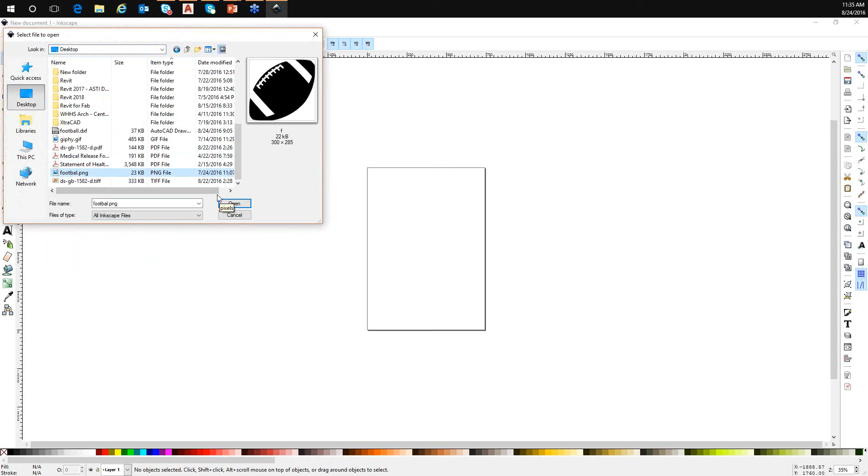I'm going to go ahead and open this image. It's on my desktop. It's football season. Okay, football, I apologize for that. So this is just an image I downloaded off the internet. I didn't do anything special to it. Obviously it is in black and white. If you're going to do something like this, black and white images is definitely the best way to go.

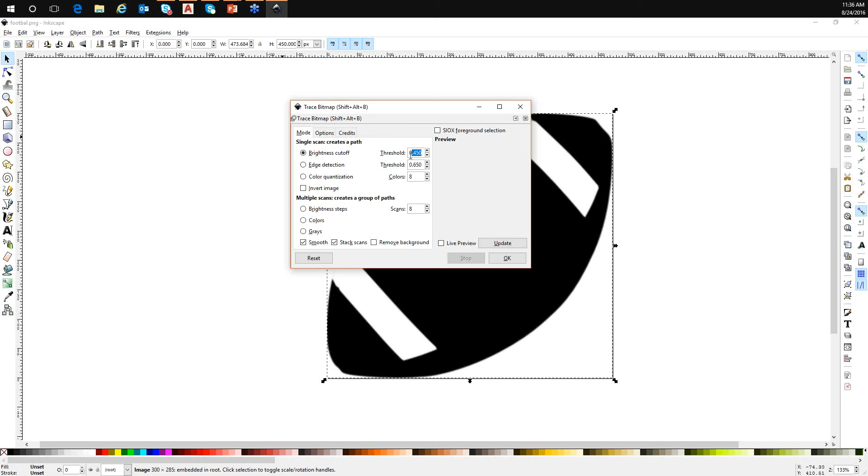So I'm going to use this. I'm going to click on the image, right-click, and go to Trace Bitmap. There's some options here to get a more optimized result of the tracing. I think by default it comes in at like 0.4, but I found a better result when I upped it to about 0.45. So I'm going to hit OK, hit Update, close this, and now move this off to the side.

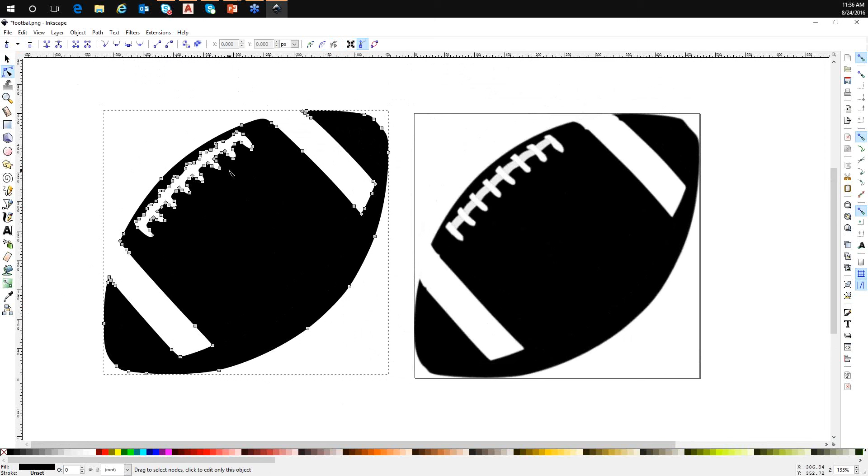Now we have two footballs. I'm going to turn on Edit Paths by Nodes over here on the left side. Now you can see these grips, which is pretty similar to what we see in AutoCAD. That's what we're looking for. So let's get rid of this football, and move this one back over here.

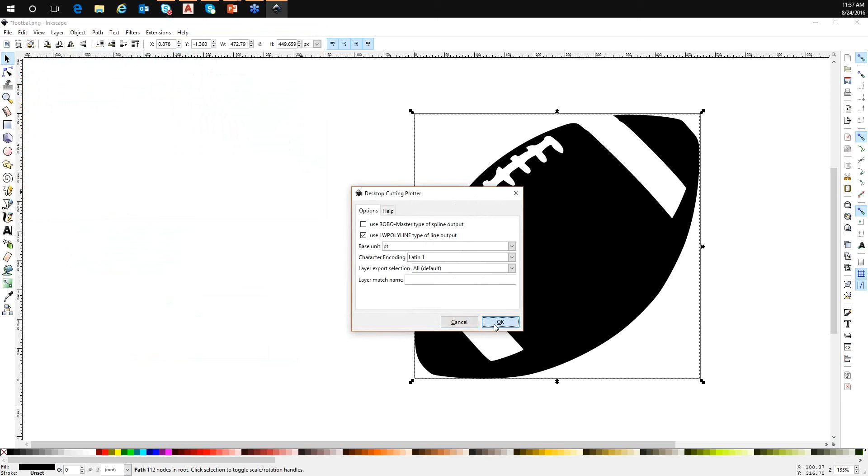Basically what we did, we just vectorized that image. I'm going to save this as a DXF file, something that we can open in AutoCAD. I'm going to save it here, and I'll replace it. Now that I've got that, I'm going to open my AutoCAD and open that DXF. Pretty cool, now I've got line work.

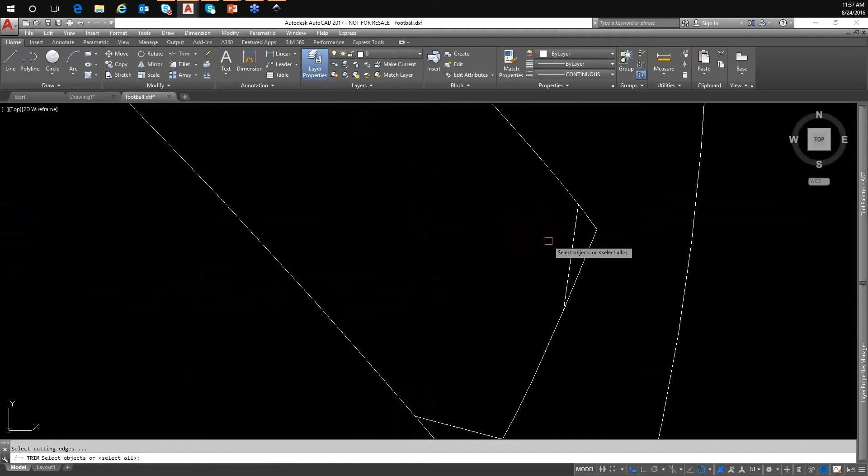Now this gives me a chance to clean this up. Obviously I don't want a cut there, so I can just use the regular trim command. Clean that up, clean that, and get rid of this stuff here.

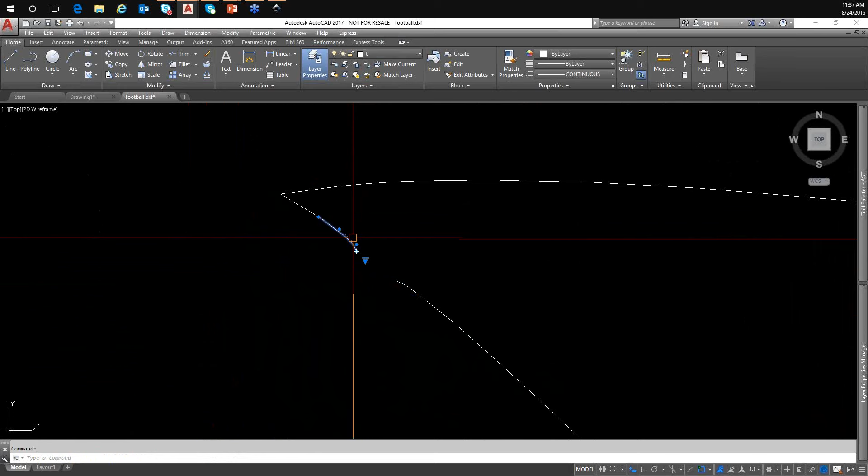Maybe you don't want that to be that way, so you can just delete and grab that node, marry it up like that. That didn't work, let's go back. Grabbed the wrong node, there we go, and let's do this one.

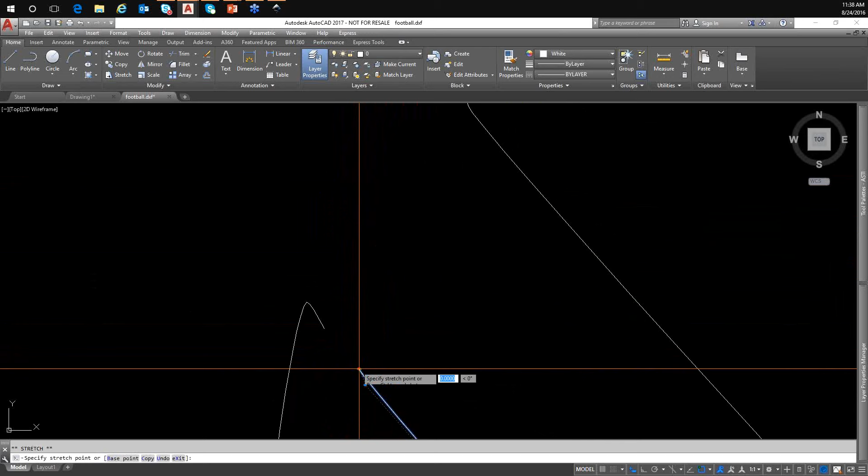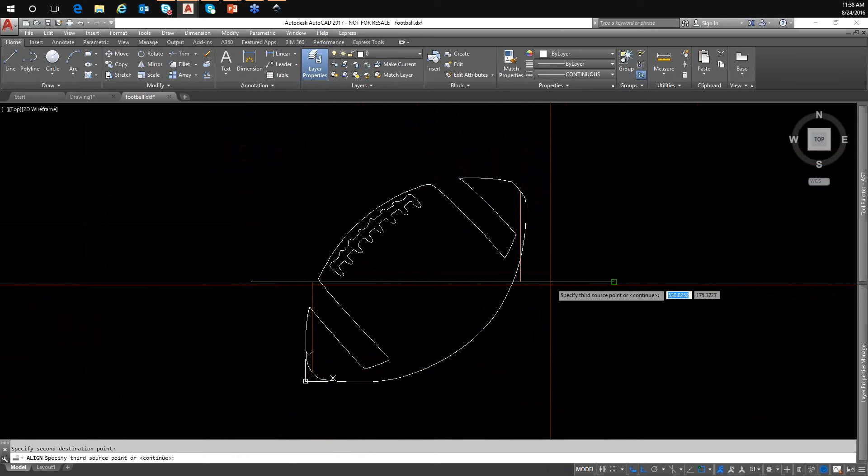Now let's scale it down because we want to burn this thing out in 12 inches. So we'll scale using that reference, take that length, and we'll say 12. Okay, so here's my pattern, pretty easy.

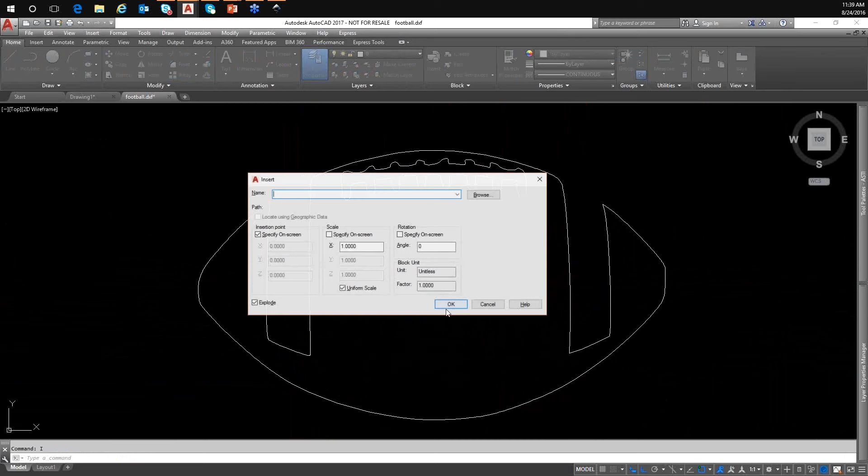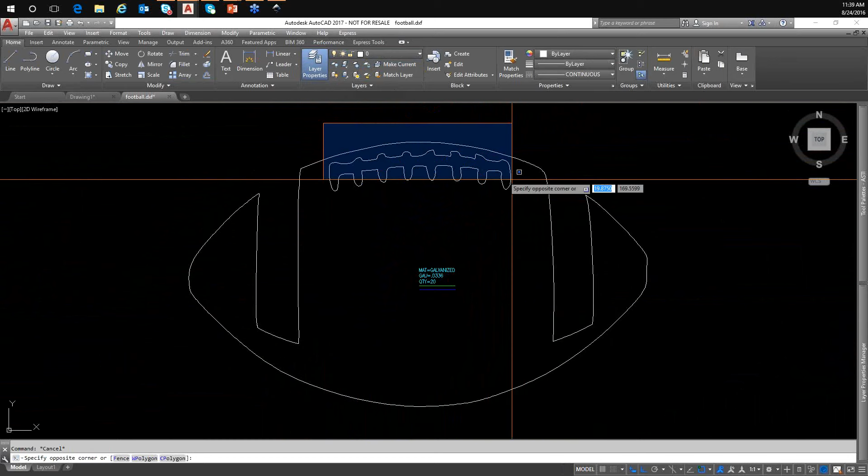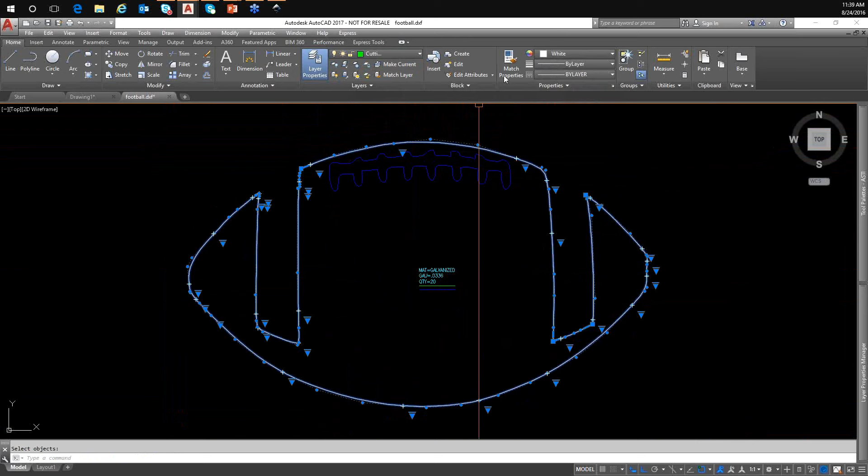What else I'm going to do is insert a block that has some information, and I'm going to put the laces on. We'll say we don't want to cut out the laces, so we're going to ignore the laces. Get the color there. Then we want to select everything else and put that on the cutting layer. Forgot to set it to select previous, and we will set that layer.

Okay, so now I'm going to get rid of these because I don't want to actually cut a line there. We have some information here - the material, we want this material to be galvanized, and this is the gauge. And we want to do 20 of these.

So I've got this image vectorized and cleaned up, pretty short and sweet. I'm going to go ahead and hit save, and save it in the same location. What I'm going to do is pass this off to our CAM guy, and he's going to produce this. So Garrett, I'm going to let you take it away.

All right, David, I'll wait on the control here to get to me, and then I'll start to share my screen.

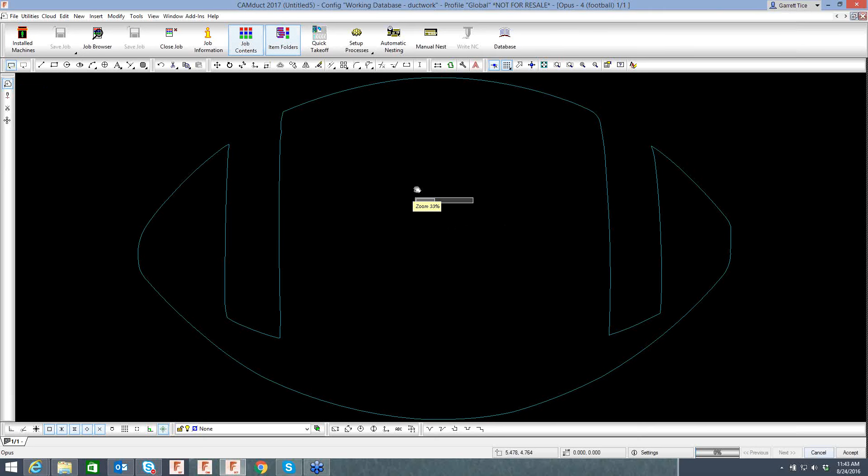And a quantity of 20. So he's letting me know - maybe he's doing cutouts for his kid's birthday party, I don't know - but he needs 20 of these at this size with this material and gauge. Because he already put that information in, I can simply hit OK. Notice that this was ignored, it's not there, it won't be processed. What's most important to me throughout this process is I'm just going to hit accept and go ahead and open, or just bring that in.

Now, I know the name of this webinar - what was it, David? DXF import, part validation, and nesting, right? So we've done a DXF import, and we've validated the part. I'm going to go ahead and nest it so we can say, hey, we did what we said we were going to do. But we're going to get a little bit deeper than that.

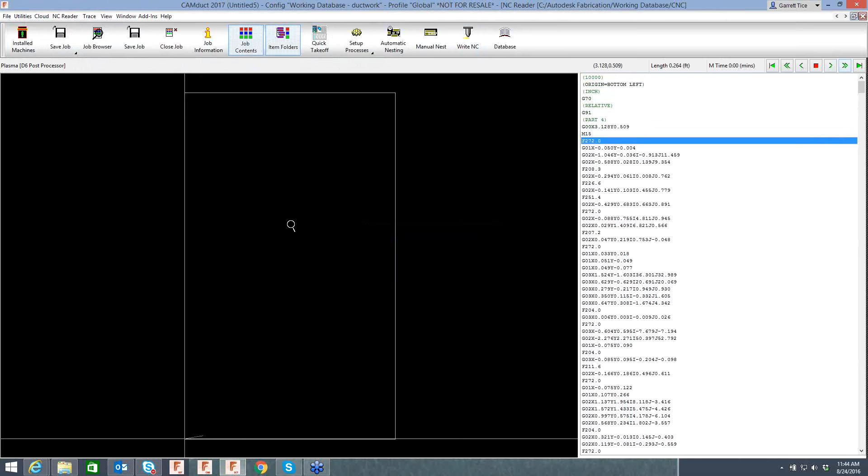It's a pretty straightforward process when importing these things. But now that we've nested it, we've done everything we said we were going to do, but we're going to get into the weeds a little bit more. I'll let this just run all the way through here - I won't make you sit and watch it, we'll just run it through.

Notice that the laces weren't cut. I'm going to go ahead and run through that process one more time, just so I can show you a little bit of flexibility when you're bringing these things in. But before I do that, I want to enter the database.

Under manufacturing, you have your layers. So if in AutoCAD you have a detailing department - such as David being my detailing department, I'm his shop for this scenario - we have the same database, so we have these layers. If David sets up a template, or you have your user set up a template, they can set up layers inside that template with the colors. As long as those layers are named the same, it will transfer over whenever the import happens.

So this says display only, that's fine - display only, default cutting, that's just our layers. Now we have layer mapping. Notice that my ignore layer, whenever it's brought in, comes to the ignore layer, and I have it set to ignore, which means I don't want anything. You could create an additional layer for marking, for example, if your table has that functionality. You can call out marks, you can call out cuts, just straight from a DXF.

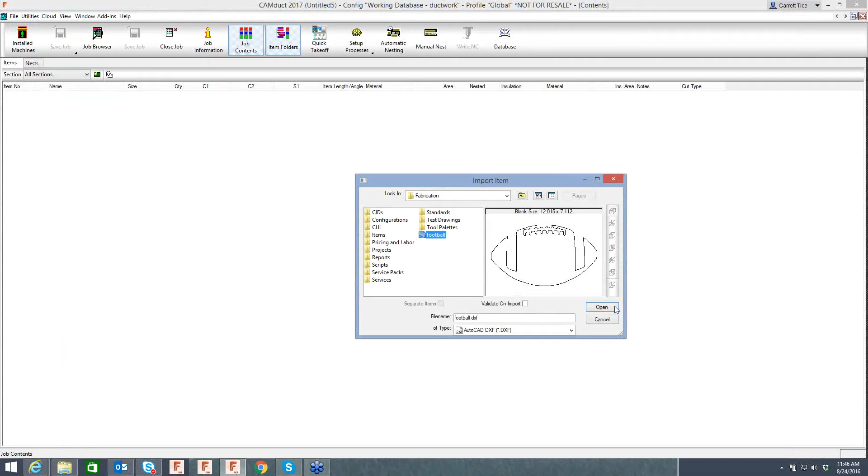So I'm going to go back into File, Import Items here, and we'll grab that football one more time. This time I actually want to cut these laces. So I can come down to the ignore layer and I can say, actually, I want you to process the elements. That's an element, it is not text. Go ahead and hit OK there. Now you can see that I have the laces.

Another thing I want to show you is, for the beginning of the example, David went into AutoCAD. He cleaned up the image, he did some things. What happens if you don't have AutoCAD? What happens if you strictly have CAMduct and someone sent you that DXF?

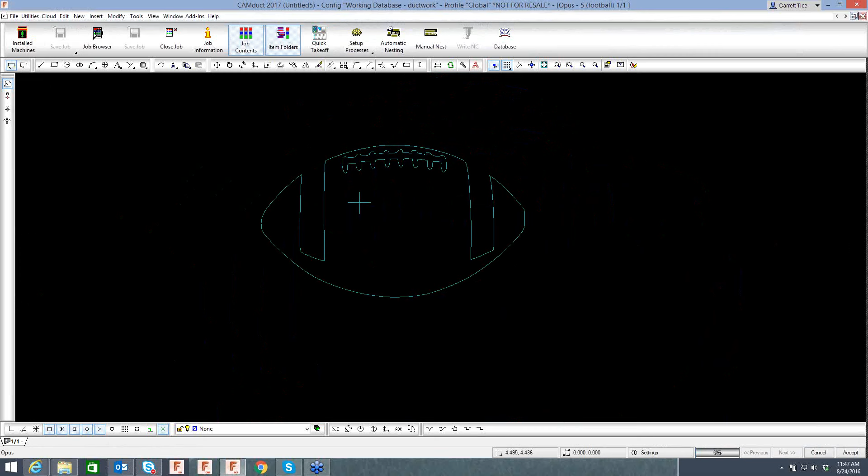Of course, you do have the ability to do the same things. The same things that David was doing, you have the ability to do. So you can just snap, move, stretch, etc., however you need to do it. You have the cleanup tools in here. This is essentially R1 AutoCAD. You can scale it. Oh, well, if I could type right.

Right. I know Fab. I don't know English very well.

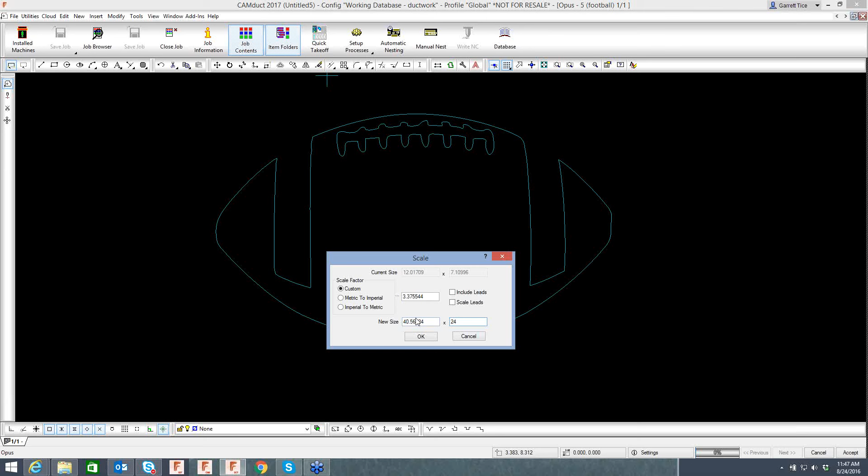Pardon my typing abilities. So here, if I wanted to say I need it to be 24 by 24, notice that based off the scale that David applied to it, it tells me what my 'by' needs to be. So if I want this to be 24, you'll notice that my new size over here will be automatically decided for me based off the overall geometry of the pattern. I'll just set this back down to 18. Hit OK, it should upsize a little bit.

And again, when I hit accept, I'll validate the piece, right? It has everything. It's got 20, it's got 22. It's got everything that I requested it have when David sent it over to me.

I'll go ahead and nest this so you can see that, well, the laces should have been cut. Let me verify.

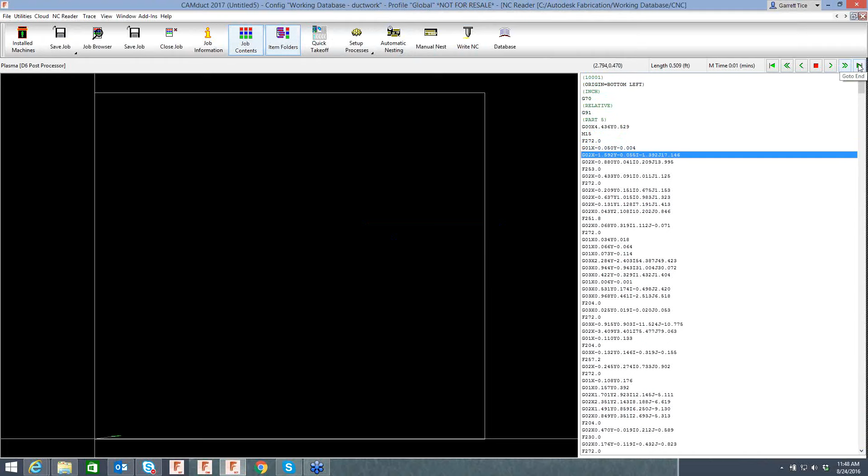All right, so let me go through that again. Import items, we'll grab the football. Oh, unclean. Oh, that's the old one, football.

Process. All right, and I can change this to the cutting layer as well. I'll just re-accept that piece. I'll nest this one here. Huh. That's interesting.

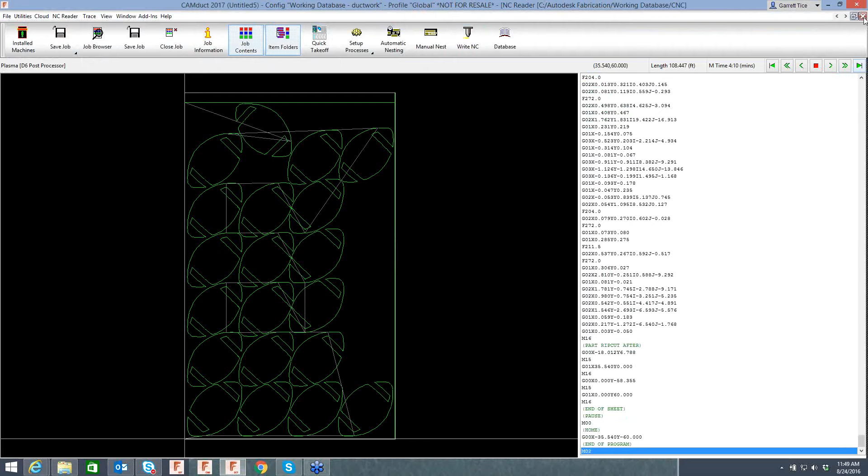I just went through this and it was fine. Maybe I'm missing a step when I'm doing the import. So File, Import, Items. Here's the football. All right, put this to cutting. Process. All right, let's see if the laces nest this time. Nope, still not nesting. Okay.

Garrett, I'm wondering if it's reading from your database item. I think you saved the football in your folders. Yeah, I believe I did a while back. Maybe delete the one out of your folders and then bring it back in. All right, but let me look at the tool here.

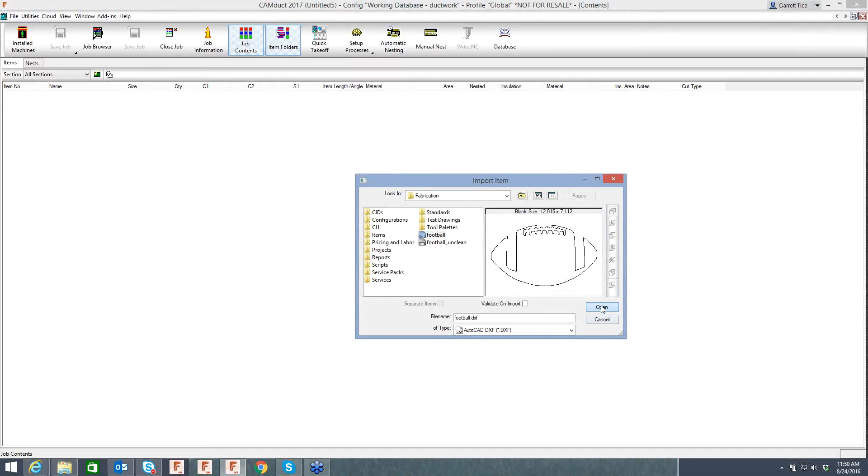There we go. Been missing one the whole time. Just change that layer to use the proper tool. It had just been ignoring it. Nope, it's a combination of all of those.

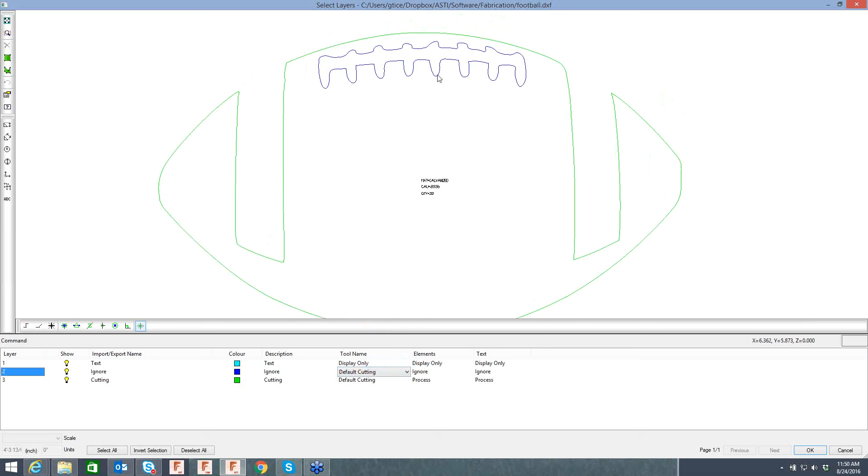So when I'm importing this item here, football, I need to set my tool name not to display. I need it to be default cutting. And I don't need to ignore the elements. Okay, so it's a combination of these three things. I had that stuck on display only and I didn't catch that. So now when I accept it, it should actually nest the laces.

Still not. So let me see if, because see the one, my football there, David, it does have the laces in it. I see that. So that's odd there.

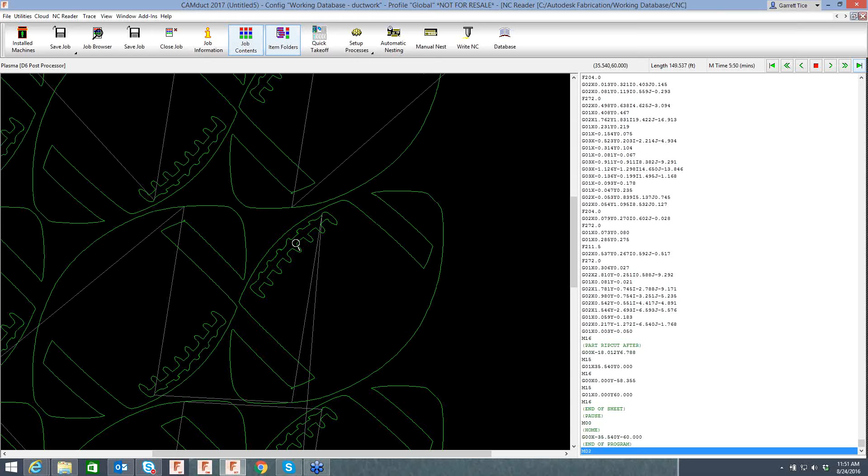Do I need to change the color as well? Okay, now it has laces. It just wasn't showing it. Okay, so it was a combination of those three things there.

So inside of your database manufacturing, under layer mapping, you can set up as many layers as you may want. These are essentially what's going to come in from an outside source. So let's say that you work with David up the road and he does all your detailing and he likes to put things on his own layer, right? If something comes in on David's layer, I can say what I want it to do as far as the map layer. So your map layer is displayed inside of layers. They're created only in fabrication. And this is essentially what stores what tool's being used.

So if you had a marking layer, you could set it to marking. If you have the cutting layer, you can set it to cutting. And based off what layer a certain portion of a DXF is on when imported, it will automatically know what it needs to do with that layer, whether it's to ignore it, to cut it, to mark it, etc.

Now, the text attribute mapping, this is key. It has to go in a certain way. It can't just be thrown in. Originally, when people said attribute mappings, the first thing that they think of is a defined attribute, or an ATTDEF, inside of CADmep or just straight AutoCAD.

That's not the case, it's simply mtext. Your search text must be identical inside of that piece. So if I spelled out, or David, when he sent it over, spelled 'material equals', my search text would not have found that when it imported it. It only looks for 'MAT equals'. So it must be identical.

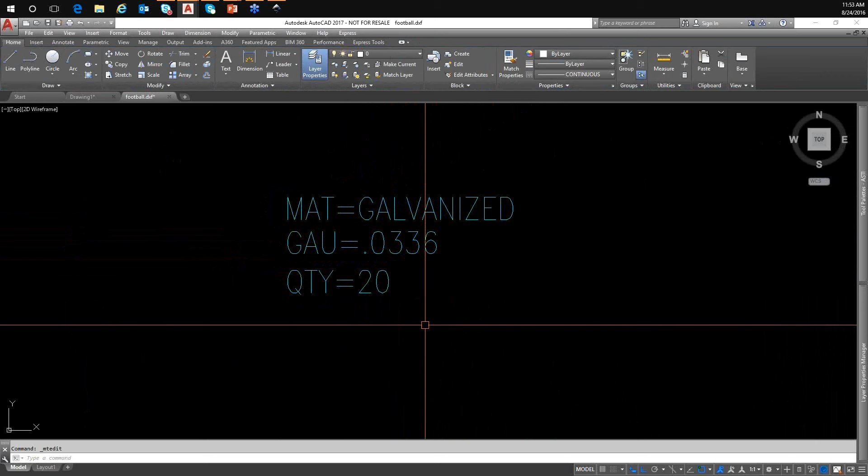So notice that he has MAT equals GALV GAU. All of my search text values are correct here. But one thing I've noticed is you have to physically have the full material name, as I stated previously, as well as for gauge, the attribute in fabrication is thickness. It needs to be that material thickness. You can't just put in 22.

As well, that's all mtext. All we did there was do mtext. Well, you can do it all in one line. I think, David, you've done it on 2 separate lines, right? I have it in 3 separate lines. 3 separate lines, right.

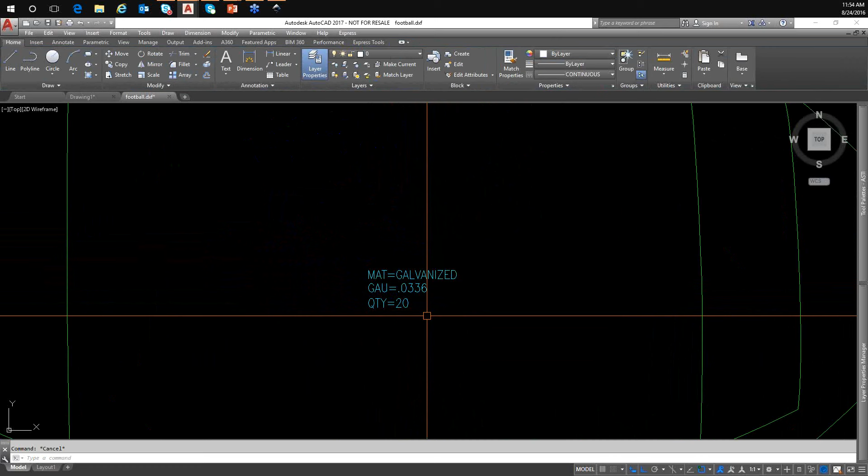So what I was thinking initially was mtext is the identifier or the search text, and then throw in an attribute definition. It's literally all mtext. The only thing you must keep in mind here, zoom out for me David, is those 3 lines of text must be enclosed by the pattern. So he couldn't go put it on one of the layers, right?

So if you want to do that, throw it out there and go ahead and resave this and call it 'bad' or something, and then I'll open it up. And I'll go ahead and steal the presenter role here.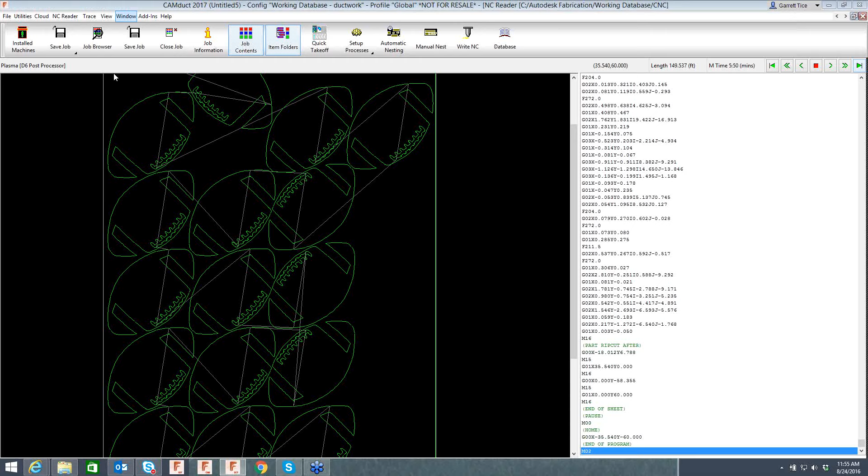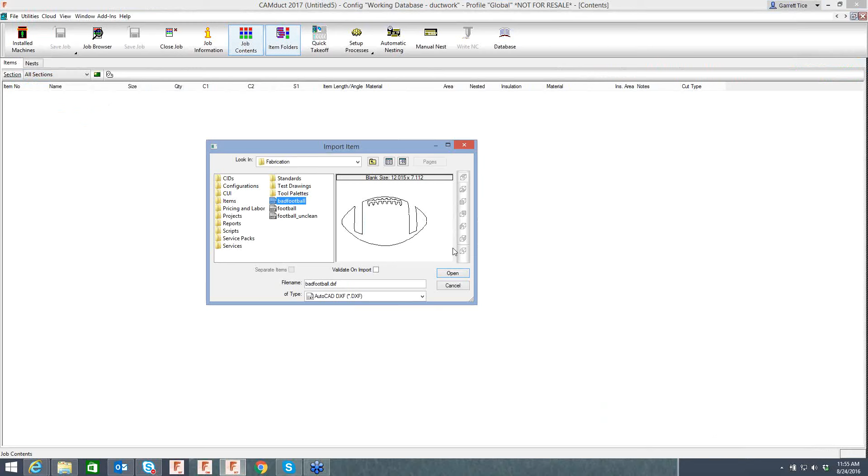All right, so we'll do, I'll just delete this one. So we got bad football. I said bad football, I don't care about the layers there, so we'll hit OK. We'll hit accept. Galvanized 22. I guess that doesn't matter. Proved me wrong again.

But I'm also in 17. Last time I tested with this was 2016, so maybe they've corrected that. But David, didn't we encounter an error with that prior? I think I remember something similar.

I was under the impression it needed to be inside the bounding area. Correct, change the layer though. I think that's a cause as well, because it's on that text layer, so it knows just to process that. Yeah, if I put it on a 0 layer or some other layer that Fabrication Database isn't looking for, that'll definitely mess it up.

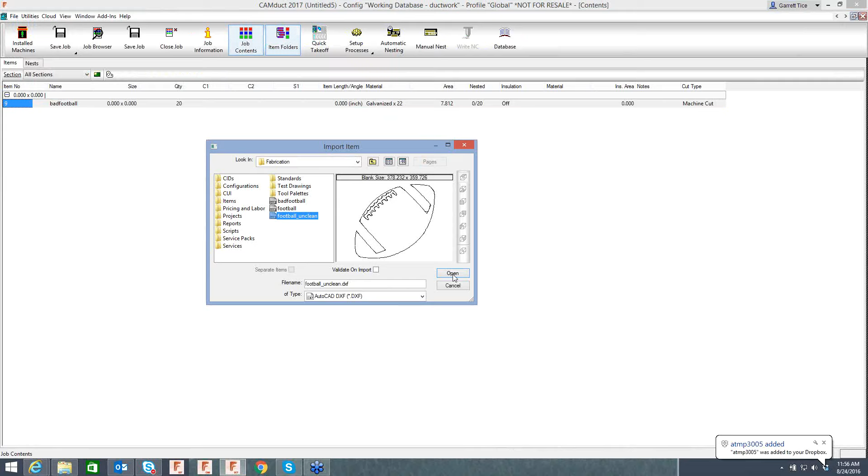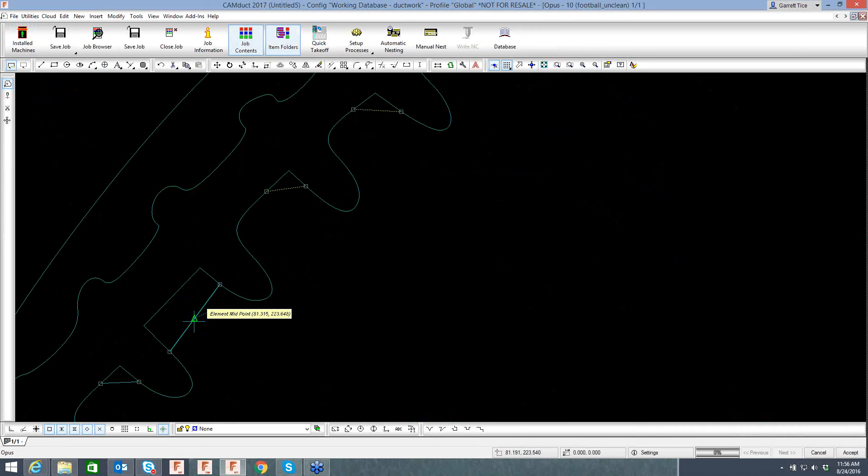And so if we just do a normal import here of the unclean one, notice that there are no layers there, right? So this is the original export that David did when we first got on the webinar today. He then opened this in CAD, came in and did his cleanup. I think that was all of them, right? So he came in, did his cleanup. I think he got rid of those there, the polyline, like that. Did his cleanup.

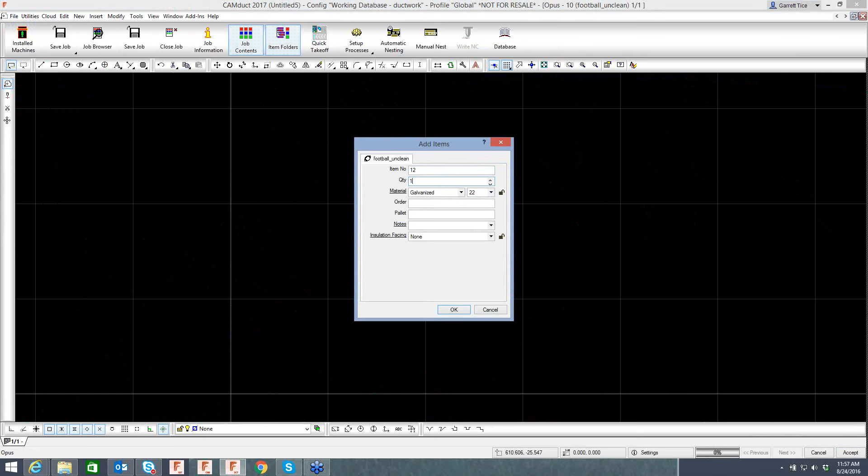But notice when I hit accept now, it's going to ask me to validate the piece. So I'm going to go ahead and validate the piece. It knows galvanized by 22, that's coming from my carryover values. But it doesn't know the quantity anymore because that information was not there. I could say 1, 2, however many. I'll just leave it at 1 for now.

Here's the football unclean. Let's say that this is something we use all the time, something I'm going to continuously do, maybe once a year, once every 3 months, I don't know. You can right-click and save it as a catalog, and that's where I had my FOOSEBALL over here. I'll go ahead and overwrite FOOSEBALL. All right, and so now it's in my item folders.

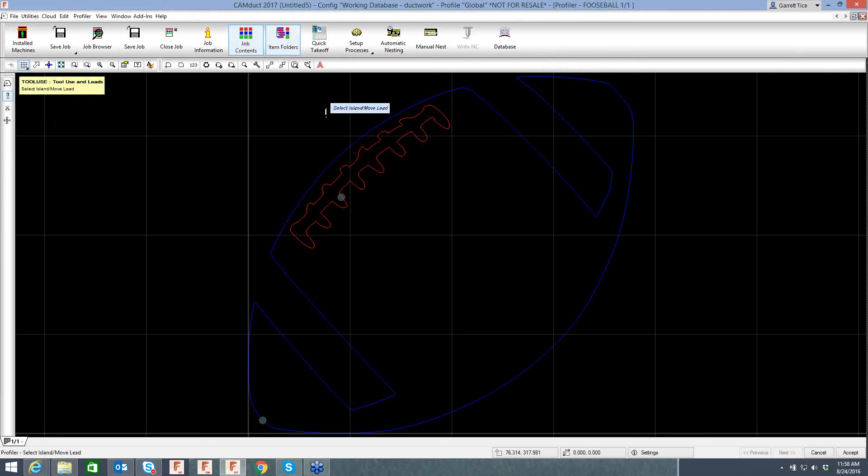If I double-click on it, I can go in and take it off. I can change the material, do whatever I need to do. If I want to change the dimensions, I can just right-click Edit, I'll be back within Opus and I can rescale it. I need to get out of the profiler. And so I could say, alright, let's do 24. Now it's scaled down, because that original you sent me just now, or I opened the original, was still large.

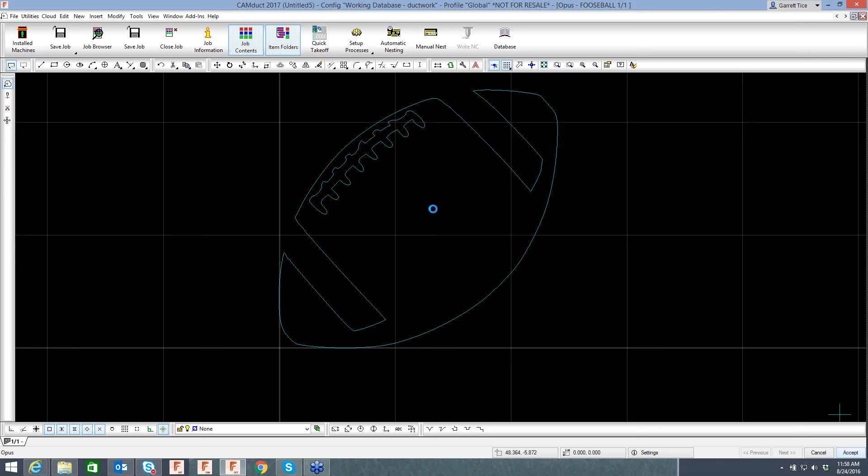Go ahead and jump back to your screen, David, and let's show the layers we have set up inside AutoCAD. CAMduct really doesn't have layers other than inside the layers and layer mapping windows that I was showing you.

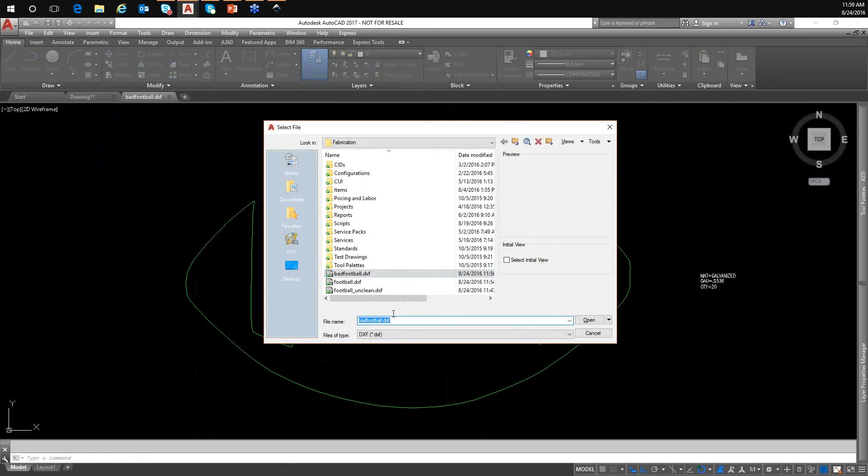In AutoCAD, you can create a drawing template with these layers predefined. I believe what David did for this scenario was create a block that had all of that information, so he inserts the block. The block has the layers, right? That's correct. What I did was just create a DWG file with the information and the existing layers.

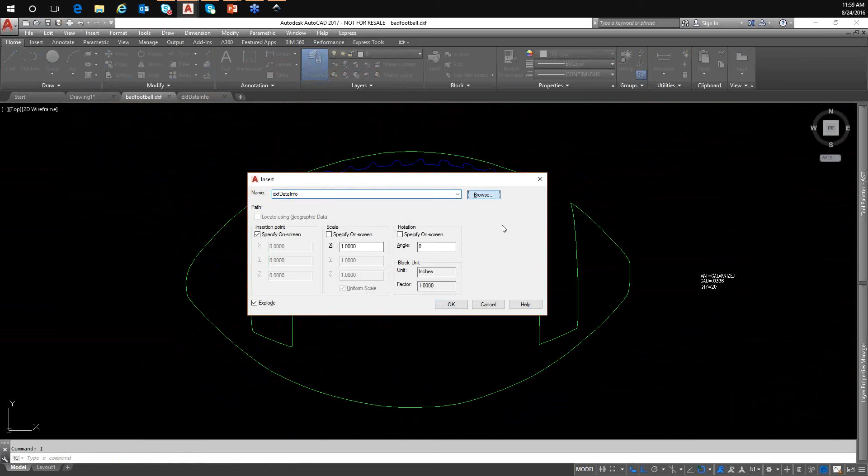Because when you bring this in from an outside source, these layers aren't going to exist. So the easiest, quickest way to get this in there is just to import this drawing as a block. I'll insert and browse to that, and it will bring in all the necessary layers and text for me to fill out. I can go through and assign the colors and everything like I did before.

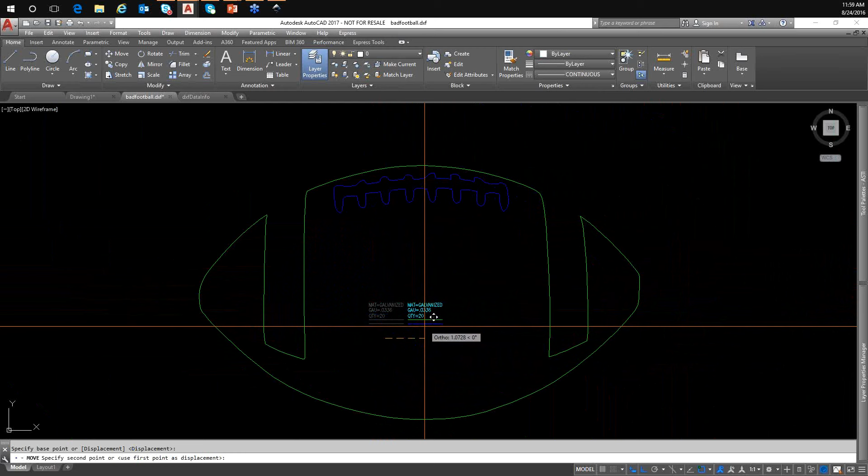Pretty straightforward. I think we can turn this over to some questions if we have any. Do we have any questions?

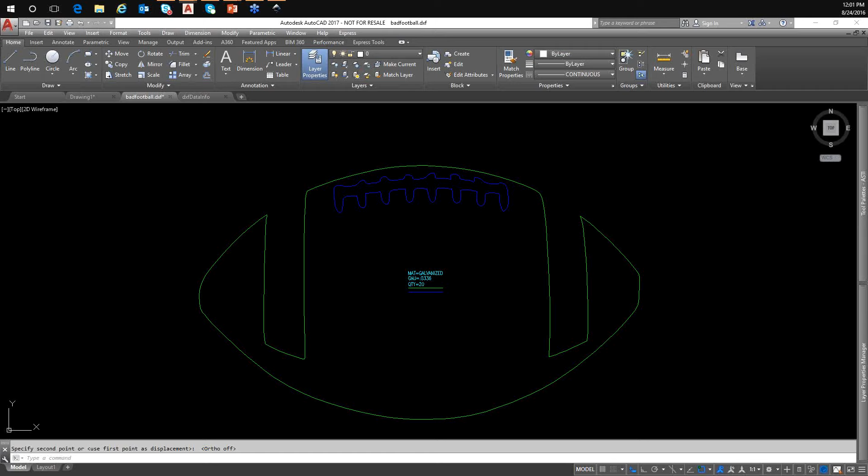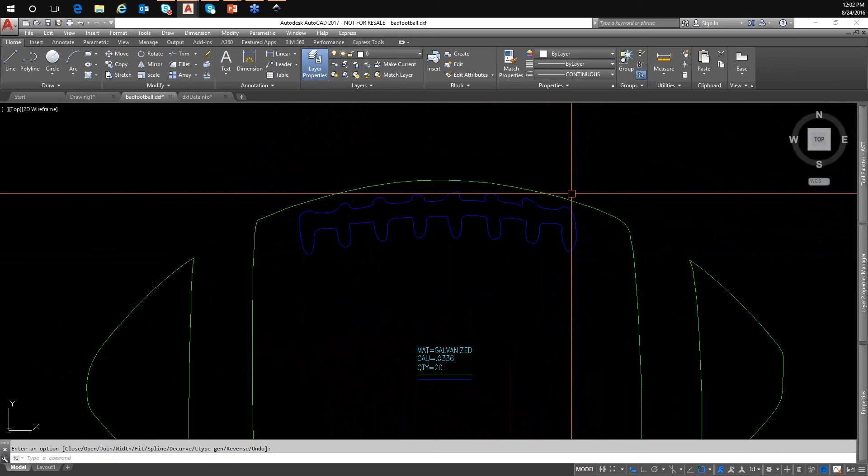No layers, no text. These are splines right here. This is what came across, and I believe we could convert these into polylines. Let's see, I don't know if we can convert... specify precision... here we go, I think I just made that into one, there we go. Okay, so that's a polyline.

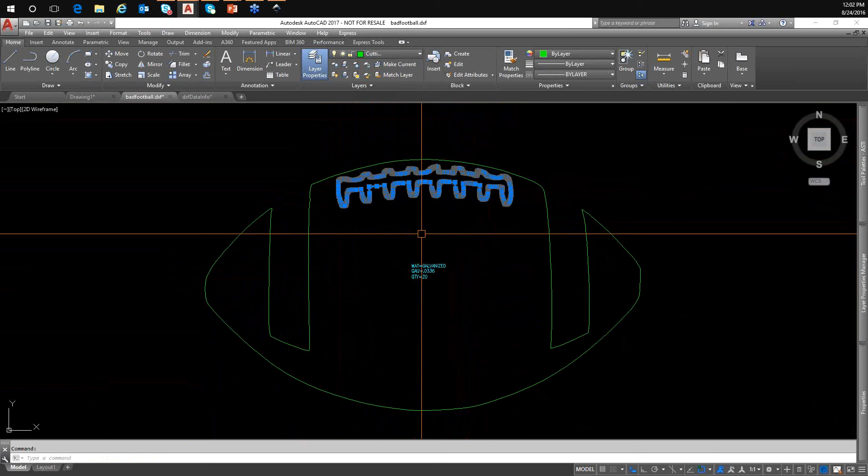Let's delete this. David said he's had issues in the past with splines working properly, maybe it's been fixed. He's also had issues with ellipses that haven't worked in the past. So, pulling the image in from the external program, Inkscape, it converted them to splines, and AutoCAD read it as a spline.

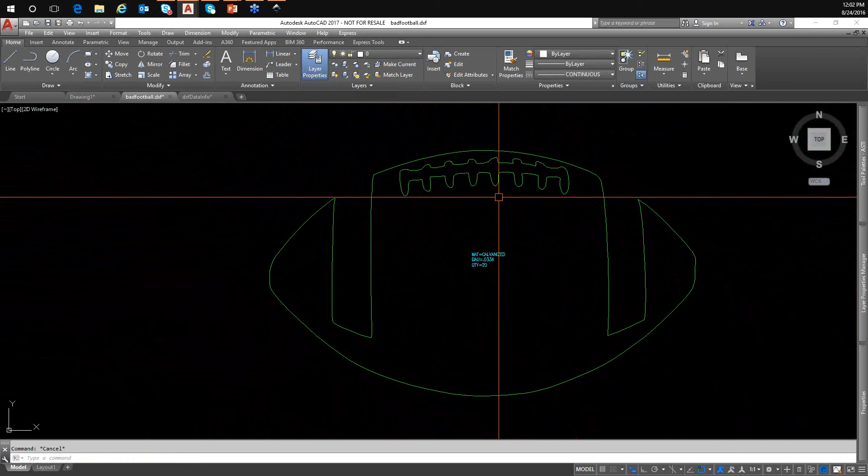So we can try to run this. I just converted these to a polyline, let's see what happens. You definitely get a lot more nodes in there, and I can see the calculations on your CAM software having an issue with that. Let me hit save. Garrett, if you want to pull that open and process it and see what happens.

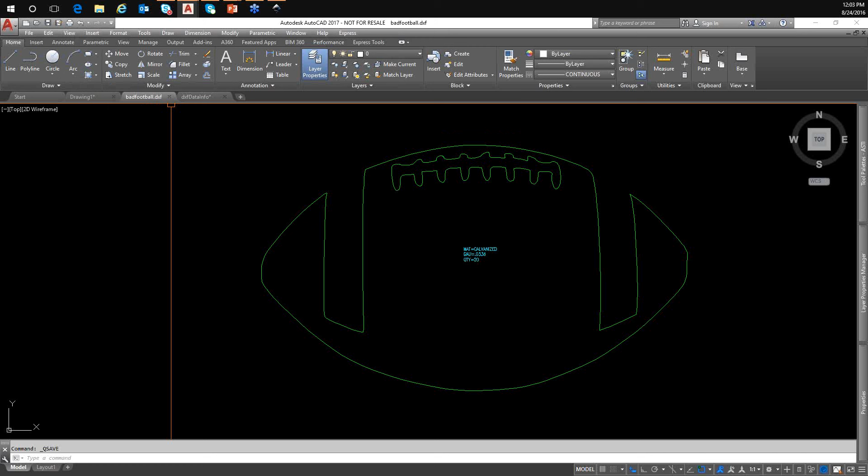Do I need to be presenter, or you just want me to relay it? Let's go ahead and show your screen. Which one is it, football? Yes, that's what you saved it as, football? Yes, okay, go ahead and open it. Do I need to share mine, or what? Yes, go ahead and share your screen.

That doesn't look the same as the one I just saved. Okay, well bear with me, because I believe Joe Truitt was... I don't know, Joe, is yours more of a question, or would you like me to relay that information to Troy?

Joe said they have made it easier. He's done this, but it's not an everyday thing. I did not know about the software to basically make the vectorized image, and thanks for the informative presentation.

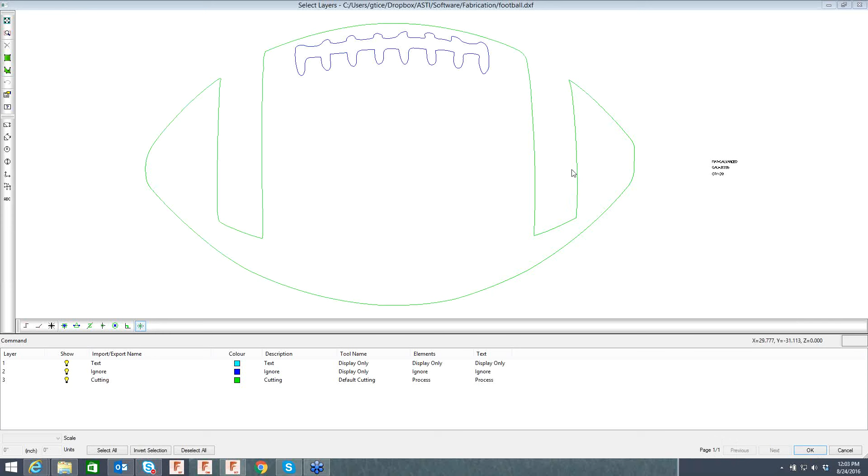Newman, you're paying attention, man. David, it's bad football, Newman is on it. He knows better than we do. Bad football, it wasn't laces out. Is that Ace Ventura?

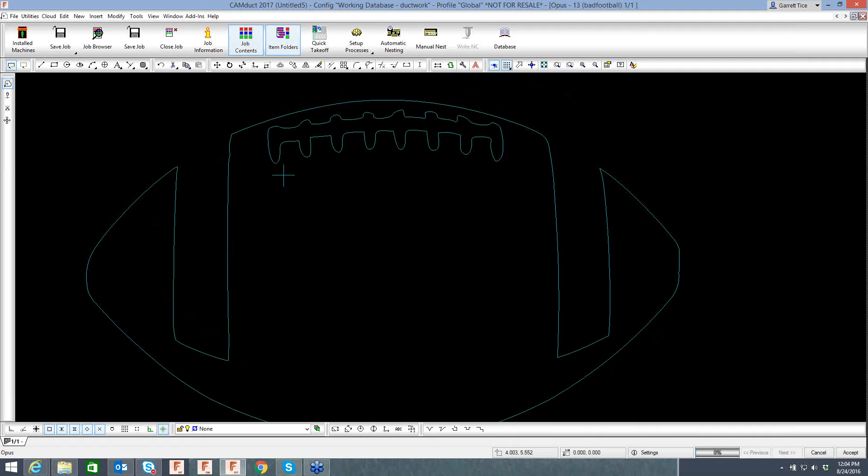So what did you want me to do here, just accept it, see how it goes? Just go ahead and process it and see if it's working with the polylines. Yeah, I mean, it seemed to have processed all, just nest that one.

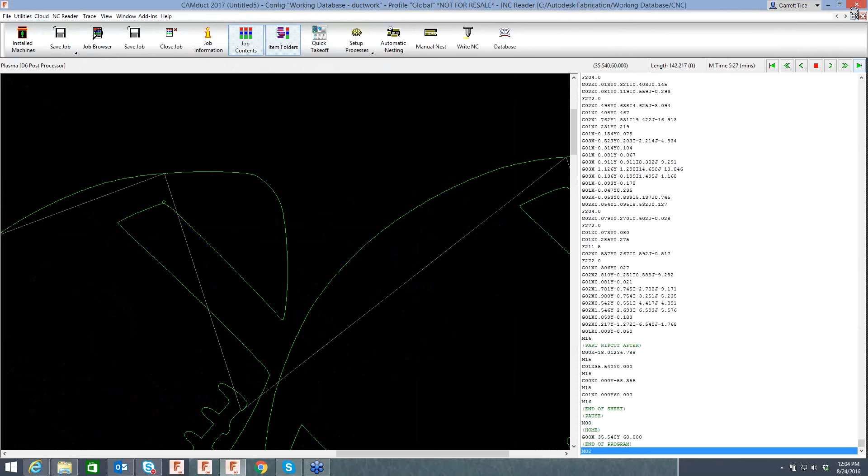Yeah, seemed to work fine. Let's look and see if there's jaggedness. You can sometimes see it visually. Here's a little bit of a flare out, you can see it's not perfectly straight, but it's a football, so it's got to have some kind of round character to it. Okay, it seemed to have worked fine there.